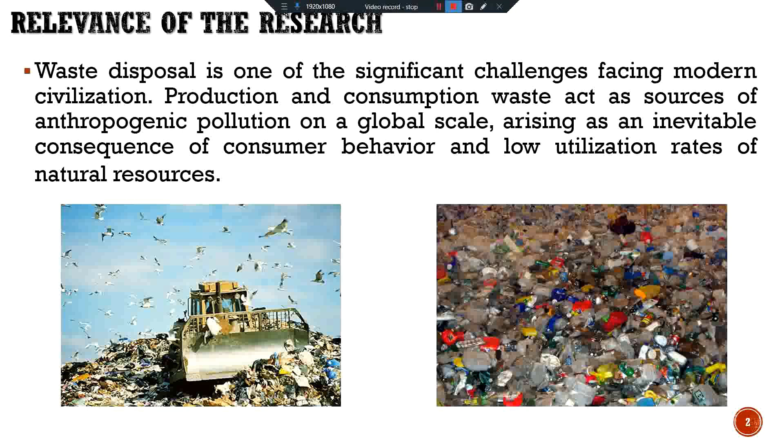Waste disposal is one of the significant challenges facing modern civilization. Production and consumption waste act as sources of anthropogenic pollution on a global scale, arising as an inevitable consequence of consumer behavior and low utilization rates of natural resources. A method and engineering design for a system have been proposed to efficiently dispose of waste with minimal environmental impact, along with reduced economic and technological costs for disposal. The system also allows for the subsequent effective utilization of thermal energy.

The proposed method is founded upon the pyrolysis process, which involves high-temperature decomposition and oxidation of toxic waste components. This is followed by the purification of the resultant flue gases and ash, which become practically non-toxic or low-toxic. At Vinnytsia National Technical University, a pyrolysis plant has been developed. This plant enables the efficient disposal of household waste with minimal economic and technological costs, as well as the efficient utilization of thermal energy.

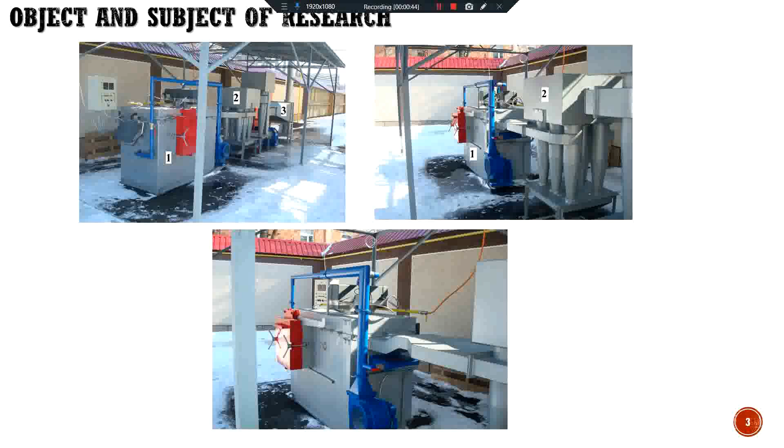The protection of atmospheric air from pollutants generated during waste disposal is a critical issue in the present era. One of the most common methods of primary cleaning of exhaust gases is ash capture, which allows for the cleaning of exhaust gases from combustion products of the coarse fraction. In order to implement this method, inertial separators in the form of a system of cyclones have become the most widely used, as they allow for a high degree of separation with low energy consumption.

Existing cyclone systems allow for high separation coefficients, but their operation is not reliable, due to slagging and erosive wear of the flow part, and not economical, due to large leaks and hydraulic resistance. Therefore, the development of new effective designs of inertial systems for cleaning waste gases based on cyclones, which work as a part of modern power plants, is an urgent task.

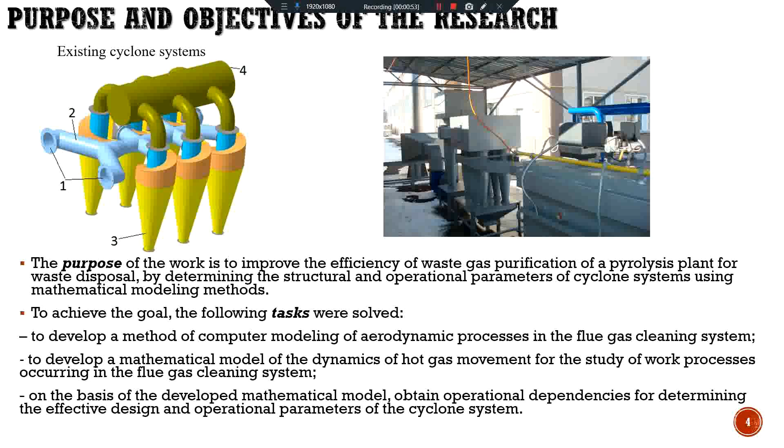Currently, mathematical modeling of physical processes is widely used, which allows the study of the influence of structural and mode factors on the main characteristics of the cleaning system. This enables the identification of specific ways to improve these systems while reducing the need for extensive experimental research. Although the calculations involved and the assumptions made in the mathematical description of the work process are complex, those models hold clear prospects for the development of designs of inertial systems for cleaning waste gas based on cyclones.

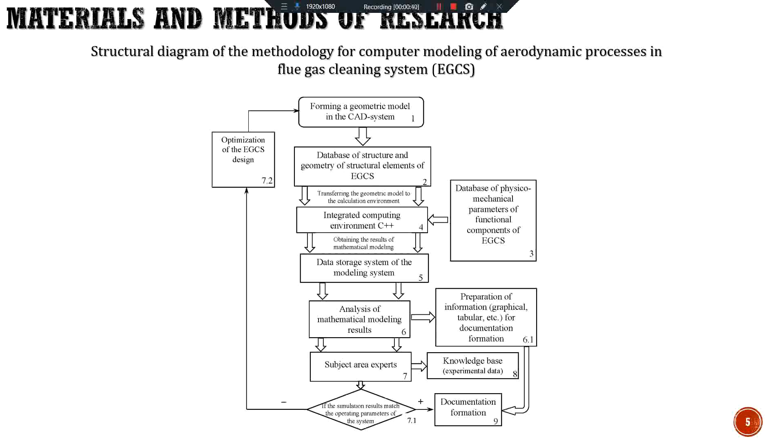For a deep and comprehensive study of work processes aimed at designing effective technological machines, a computer modeling method of aerodynamic processes was developed for the flue gas cleaning system. A mathematical model describing the dynamics of hot gas movement incorporating two distinct phases has been developed for the theoretical examination of exhaust gas purification processes in inertial gas cleaning systems.

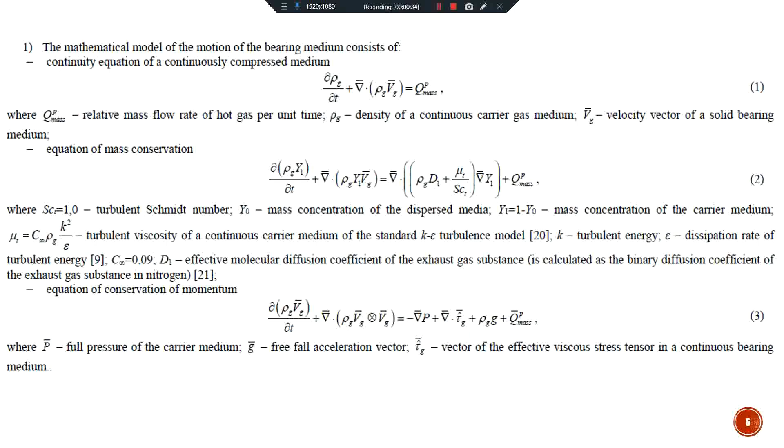On the basis of the technical drawings of the pyrolysis plant in the CAD system, a three-dimensional CAD model of the design of the cyclone system was developed. The model used for the collision of particles with cyclone walls is one that incorporates partial velocity damping. It is also assumed that the dispersed particles do not interact with each other, while introducing the average particle movement resistance coefficient. In this geometric area, the model of turbulent flow in a weakly compressed two-phase medium serves as the basis.

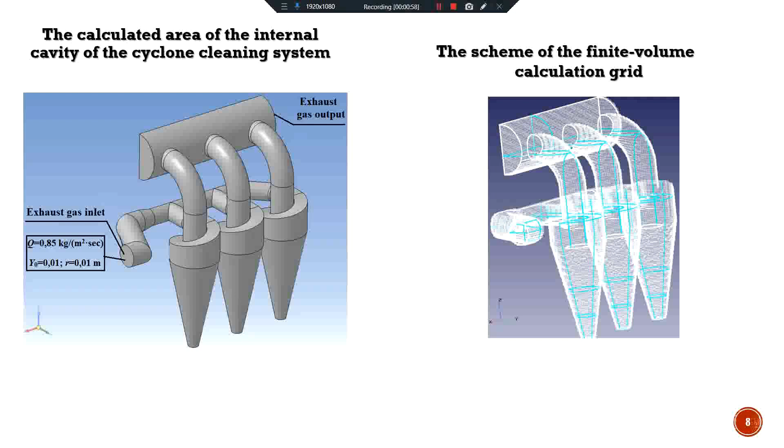Since the aerodynamic process is calculated using the finite volume method, it is necessary to construct a finite volume calculation grid for further calculations. This grid should also take into account the flow near the characteristic elements of the burner design, which can create local vortices. The calculation grid was initially made uniform throughout the calculation area and then adapted to different levels on the surface. Using the methods of numerical solution for systems of partial differential equations, the mathematical model was solved in an integrated numerical environment based on the C++ programming language.

The calculation of the above equations resulted in the distribution of the concentration of dispersed particles in the cavity of the cyclone system. The result of the calculation of hydrodynamic processes is also the distribution of exhaust gas flow velocities in the cyclone system cavity. Analyzing this distribution, it is clear that the highest concentration of coarse pollutants is generally located in the cone-shaped cavity of the cyclones. Moreover, the highest concentration of dispersed particles is located on the inner walls of the cyclones, which confirms the effectiveness of using centrifugal force to clean the large fraction of flue gases.

It can also be noted that the thickness of the wall layer of dispersed particles increases as it approaches the height of the cone, which, in turn, confirms the effectiveness of using external gravity to settle the separated large pollutants. The use of cyclones installed in parallel contributes to additional purification of exhaust gases from larger pollutants, as evidenced by a decrease in the concentration of dispersed particles at the collector inlet and the resulting separation coefficient of 0.83. Also, the analysis of the distribution of velocities in the cavity of the cyclone system was performed.

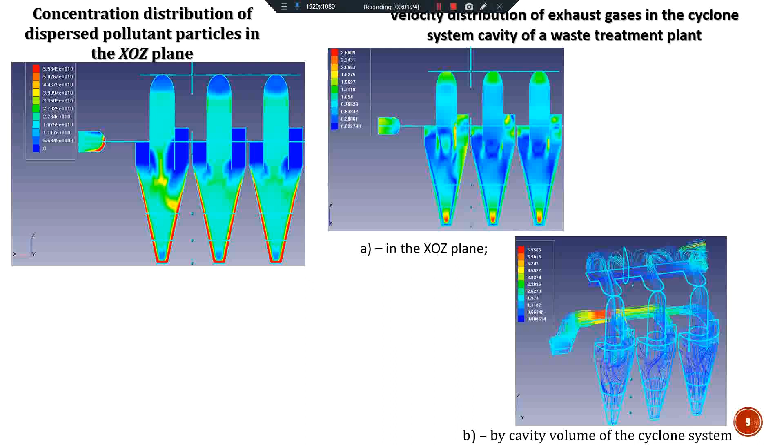Based on the results of numerical modeling of the exhaust gas purification process of a pyrolysis unit for waste disposal, a value of the separation coefficient of 0.83 was obtained for the minimum size of a dispersed particle of carbon-type pollutants of 0.2 mm, for an average velocity of exhaust gases in the pipeline of 1 meter per second. The developed design of the inertial exhaust gas cleaning system of a pyrolysis plant for waste disposal consists of 3 cyclones with a diameter of half a meter and a nominal diameter of 5 centimeters. The results obtained from numerical modeling of the inertial exhaust gas cleaning system of the waste disposal unit showed the advantages of the chosen modeling approach and also proved the effectiveness of the developed cyclone